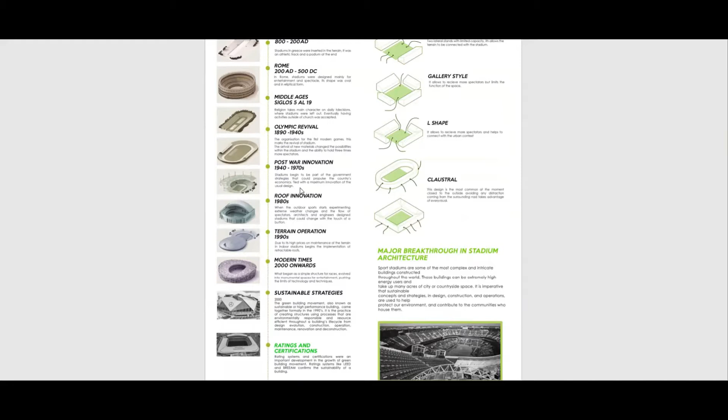As we go down the years, the stadium takes its shape as a political and economical structure, thereby overpowering the communal instinct and making it a piece of infrastructure that could earn a lot of capital for a single individual or government rather than benefiting the whole community. What began as a simple structure would then change into a complex structure involving a lot of technology and techniques. These would include sustainable strategies that are important to creating structures that are energy efficient and economical throughout the building's life cycle.

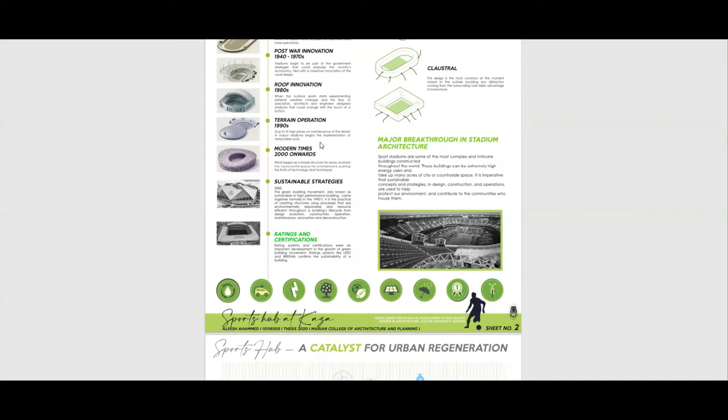Sports hubs could in many a way act as a catalyst for urban regeneration of a city. Stadiums of tomorrow could be a concept which involves more social involvement and giving less regard to the economical aspects. A stadium that lives more than sports, which would mean integration with the social infrastructure.

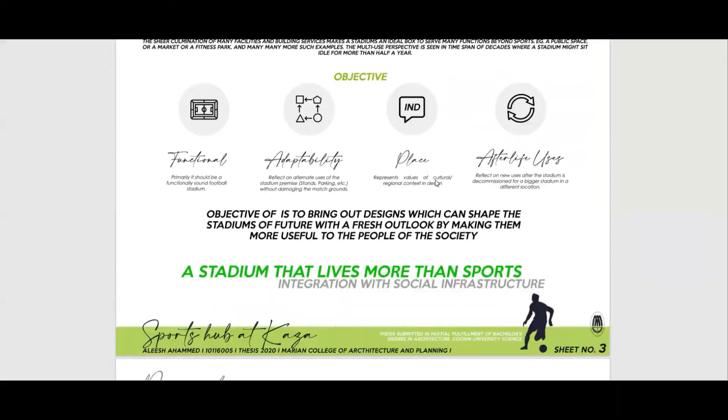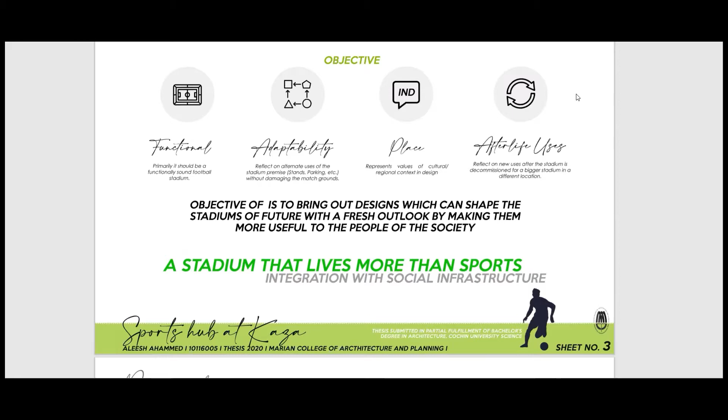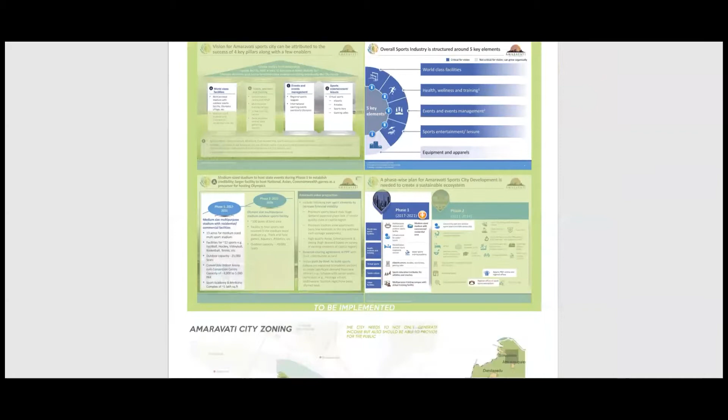Taking into account the present proposals for sports cities, the Amaravati city has been a welcome one. As and when Amaravati is declared the capital of Andhra Pradesh, there will be a sudden surge of development in the capital area, which includes dividing the city into 9 different zones, of which a sports city is one. The proposal has been rearranged by taking into consideration the present location of the site, which is near the Krishna River. The Krishna River is home to thousands of farmers, and such a proposal would mean loss of land and income for a lot of people.

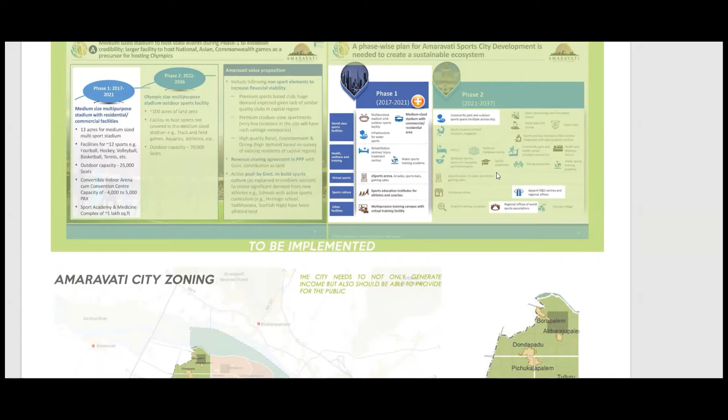The banks of the river are rich in agricultural land, which means the installation of huge infrastructure would result in improper usage of the land. The current proposal has two phases, of which a culmination of services that would mean development in a regional perspective is taken into consideration. This would include a medium-sized stadium, a community park, different sports association offices, and a training academy. Since the site of the proposal is not feasible, taking into account the social impact, it is important to find a new and feasible location for the project.

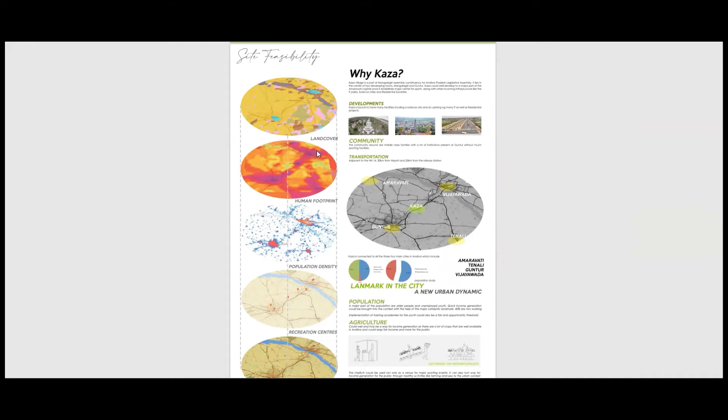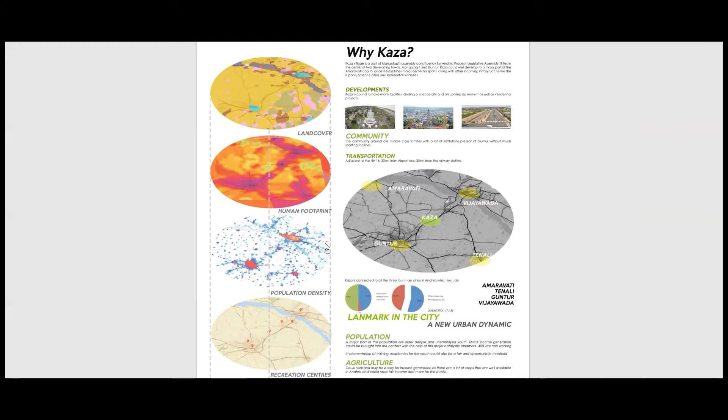Andhra Pradesh is a state wherein Vijayawada, Guntur, Amaravati, and Tenali are the main cities that form a quadrant. Kaza lies in the center of the NH between Vijayawada and Guntur. It remains as a center for development that could immediately trigger the urban scenario of Andhra Pradesh and help in producing a new urban dynamic by the showcase of the identity of the territory. A sports hub should be able to cultivate shared values between sports and sustainability.

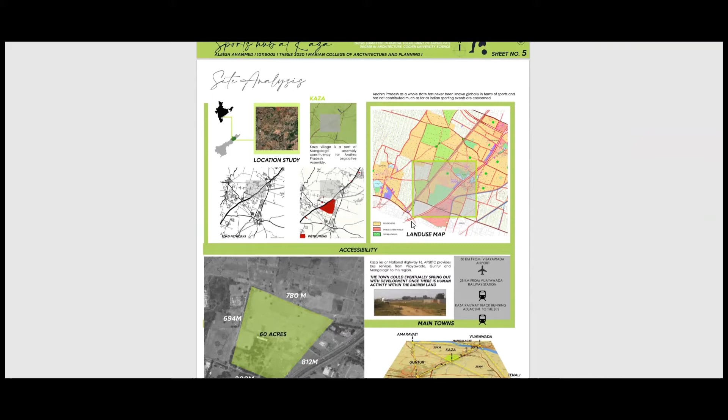Kaza as a town is accessible via road by the NH16 that links Guntur and Vijayawada. The site taken is a piece of land that is unused and away from any human involvement. The site area is 60 acres and is very close to the NH. Many sports-related institutions are found in and around the town, including the Amaravati Cricket Association Stadium. These are just patches of land that are dedicated as a ground for institutions that surround the area.

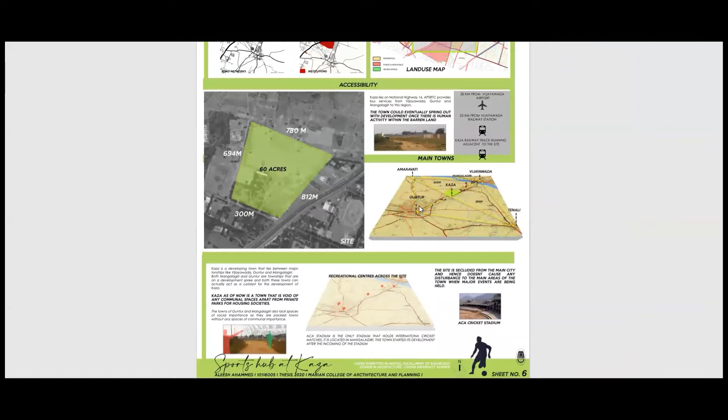The whole site is surrounded by wide roads that are accessible from all sides. There is a patch of land just in front of the site which is reserved for commercial development. The people here are mainly a majority of old and young people. Three main case studies were brought into the whole dynamic based on the usage of the stadium and its popularity.

The first one being the Jawaharlal Nehru Stadium in New Delhi. It is a major sporting institute in India capable of hosting major events. The stadium is open to the public and has a very diverse structure to it. Most parts of the stadium are abandoned throughout the year, and the outer parks and plazas are rented out for public engagements. Parking is provided throughout the site and is completely abandoned throughout the year if there are no sporting events happening.

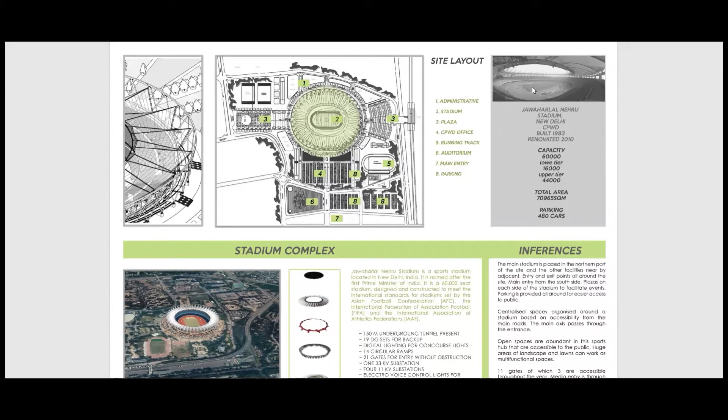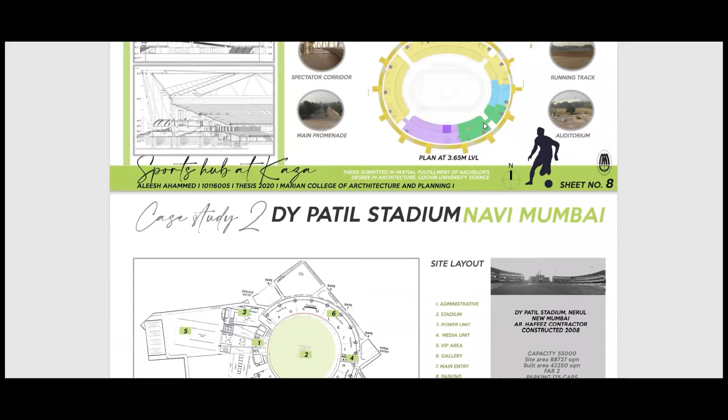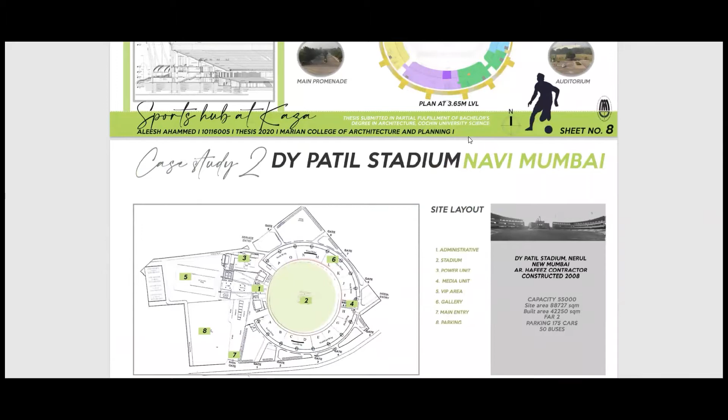The next stadium is the DY Patil Stadium in Navi Mumbai. This is a privately owned stadium and is completely restricted to the public. The stadium on its own is a landmark with its enormous structures. Usually they host 10 to 12 events per year, and the rest of the year the whole stadium stays idle. The whole stadium is built solely for the purpose of sports and concerts. And since it is a private stadium, rental services are provided and the common public has no access inside.

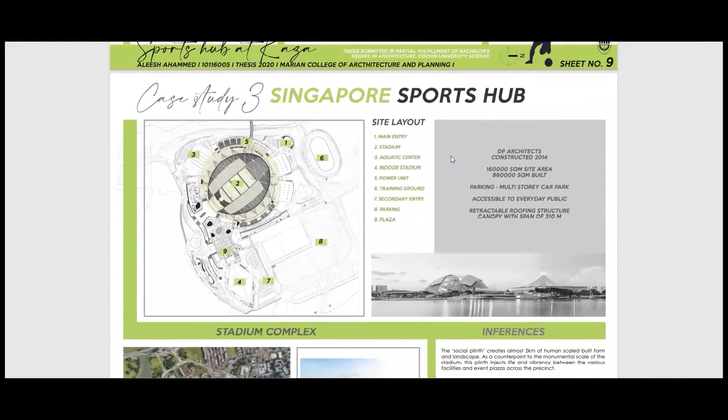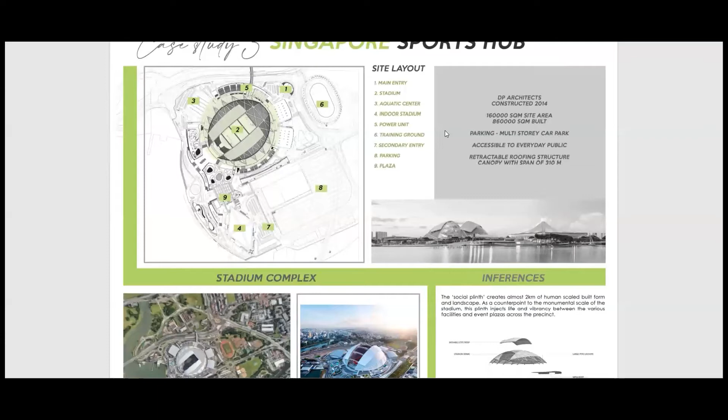The next stadium which has been taken into consideration is the Singapore Sports Hub, which is one of the most economically stable and sustainable stadiums in the world. The whole stadium is ecologically very balanced and it acts as a park, which is open to the public and brings the community inside the stadium, which makes it very active.

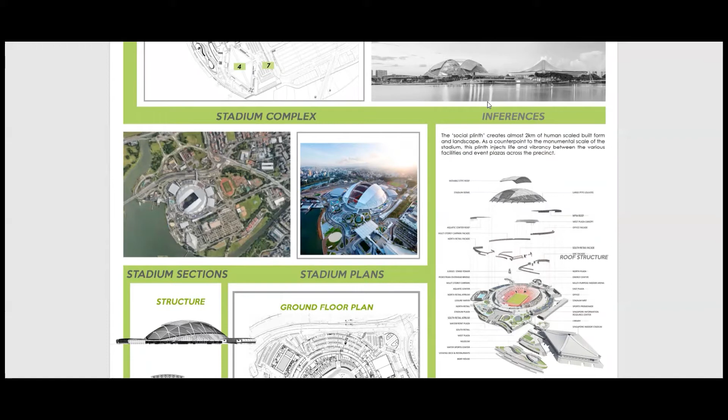There's something known as a social plinth, which creates almost 2 kilometers of human scale built form and landscape. As a counterpoint to the monumental scale of the stadium, the plinth injects life and vibrancy between the various facilities and event plazas across the precinct. The sports hub integrates landscape, water systems, and planting extensively, creating a natural setting and high quality public waterfront environment.

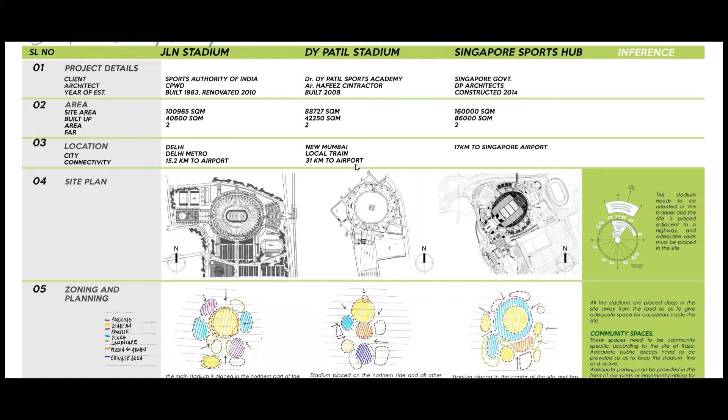Taking these three stadiums into consideration, we have a set of inferences that need to be looked into. First being the position of the stadium. The stadium needs to be oriented in a specific way as mentioned. As we come to the zoning and planning, all the three stadiums are zoned directly in the middle of the site so as to allow better public access. The spaces need to be community specific according to the site at Kaza. Adequate public spaces need to be provided so as to keep the stadium active and live.

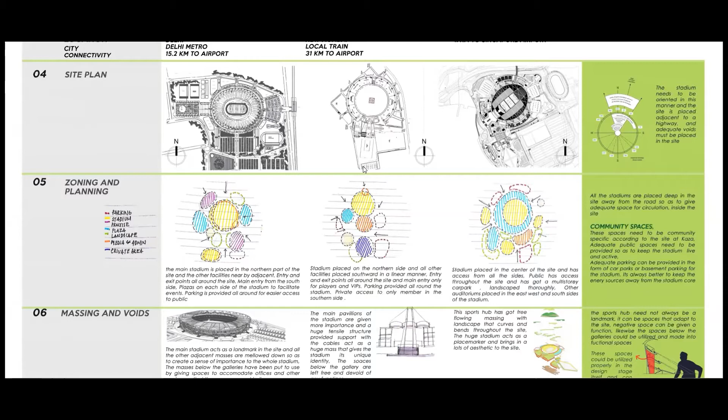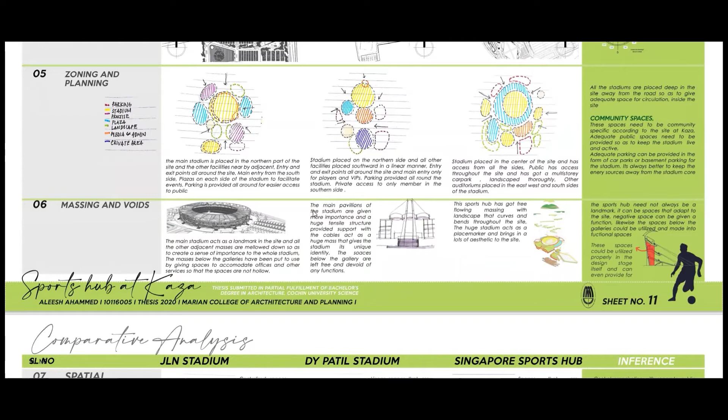Parking needs to be provided in the form of car parks or basement parking in a sustainable way, so that the parking can be used throughout the year. The sports hub need not always be a landmark. It can be spaces that adapt to the site and can be given a function. Likewise, spaces below the galleries could be utilized and made into functional spaces. These are void in all the three case studies.

So we come to the spatial organization. The central organization is mainly utilized more as it caters to the public a lot easier than if it was a linear organization. Open spaces: uniform distribution of open and built spaces is required so as to create multifunctional spaces inside the site. Increasing the number of entry points in the site so that the incoming public is controlled, and making entry points based on the usage groups in the whole site, is a major part in designing the circulation of the whole stadium.

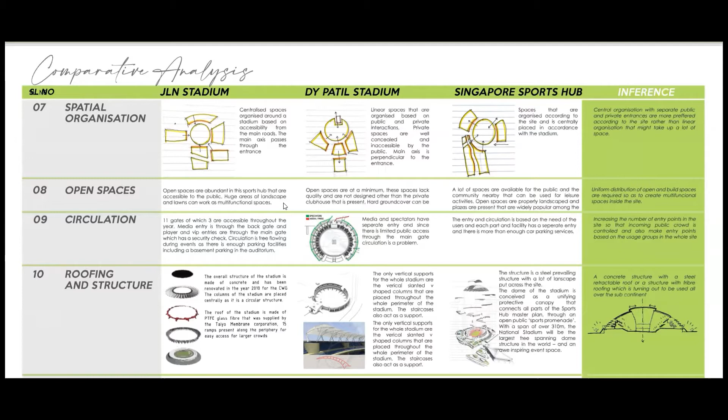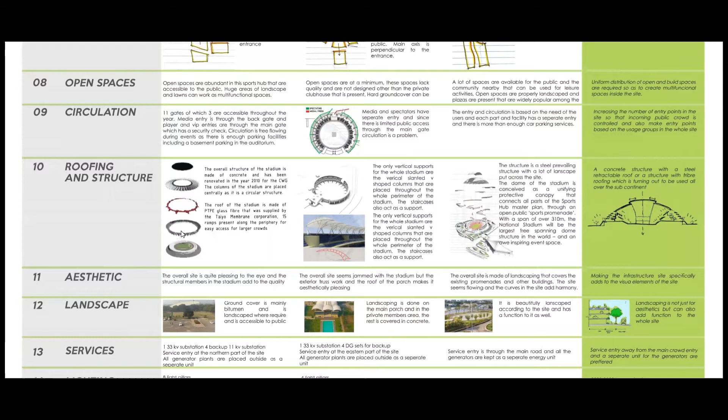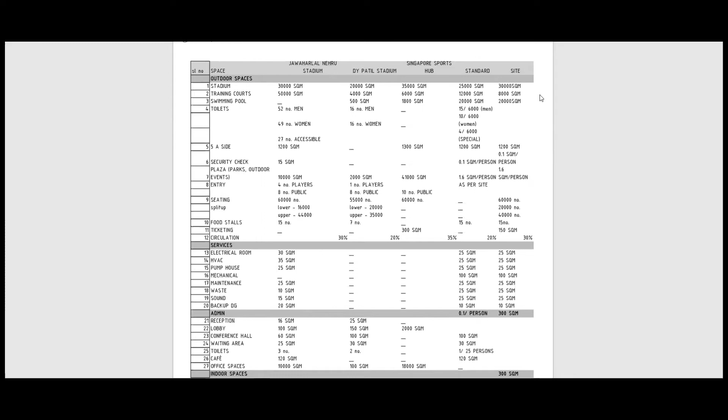The roofing structure is different for different stadiums. The roofing structure mainly consists of a structure that is aesthetically very beautiful and possibly serves a function as a shade for the gallery. The landscape is a major part in all stadiums. Landscaping is not just there for the aesthetics but can also add function to the site. A comparative analysis of the areas that have been specified in each of the stadiums taken as a case study could be put hand in hand with the standard values of each of the spaces, and a normalized value could be added that could be used in the proposal.

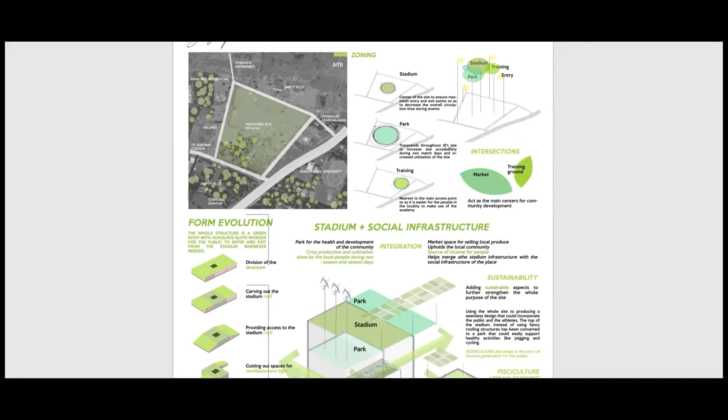Park D Casa is an ode to social infrastructure that may be a new beginning for the entire city of Amaravati. The design revolves around the three main principles in a sports hub: society, economics, and politics. The sports hub is a culmination of three main spaces that are overlapped and hence function together in harmony. The spaces include a park, a stadium, and a training complex in which all the three principles can be seen to exist mutually.

Sustainability plays a major role in reforming the whole design, not only because of the materials used and the energy efficient technology that is projected throughout, but also the involvement of the local communities to a greater extent. The park along with the stadium coexist so as to provide employment, entertainment, and energy to the local community. The stadium is multifunctional and can provide for the community in a number of ways, one of which is a market that provides employment and makes another niche for the society to engage in healthy involvements for the community.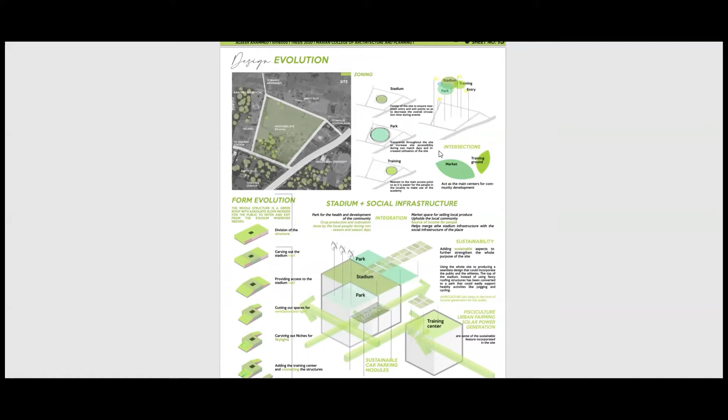The zoning consists of mainly three main spaces: the stadium, the park, and the training complex. The subsets that are formed by the overlapping of the stadium, the park, and the training complex can be used to break the monotony of the whole site. The stadium is centrally located as we inferred from the above case studies. The park is laid out throughout the site to increase accessibility to the public. Since the park is laid out throughout the site, it extends over the roof of the stadium and different slopes or different access points are provided.

The slopes are included with openings that allow the light and ventilation to be carried out easily. The top of the stadium is a green roof that supports intensive farming and also easy movement of water for drainage. The spaces beneath the roof are used as market spaces to sell the produce of the harvest from the local community and the park throughout the year.

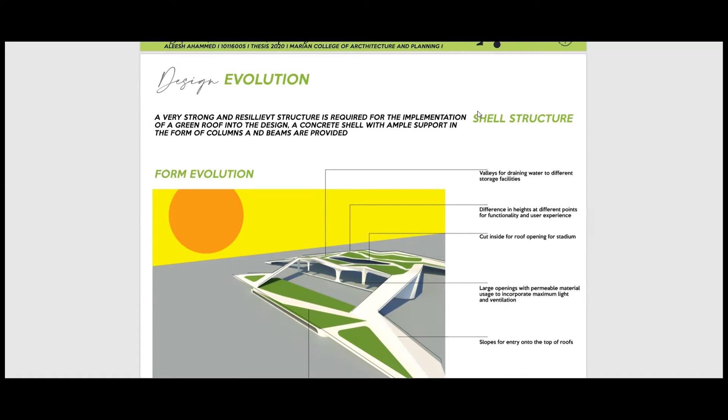A very strong and resilient structure is required for the implementation of a green roof into the design. Concrete shell with ample support in the form of columns and beams are provided. Valleys for draining water to different storage facilities. Difference in height at different points for functionality for user experience. Large openings and permeable material usage to incorporate maximum light and ventilation. Slopes for entry into the top of the roofs.

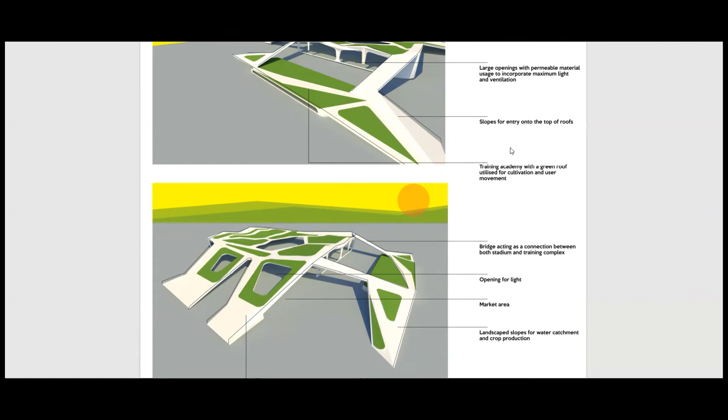A training academy with a green roof utilized for cultivation and user movement. Openings that are provided for light and ventilation. A market area that is used for economic development for the community. Landscape slopes for water catchment and crop production.

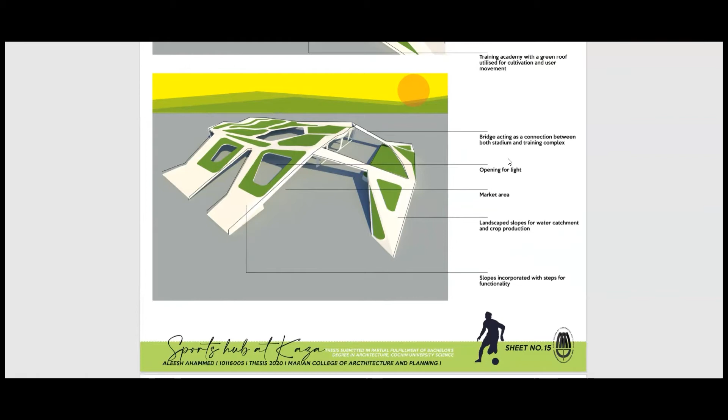The site is generally divided into three main parts. One is a park which is extended throughout the site. The next is a stadium which is located in the center of the site, and the next is a training complex which is combined to the stadium with the help of two bridges.

Some other features of the site can be divided into three based on economy, entertainment, and energy. The energy is dependent on the grid, which is formed by the sustainable car parks and the solar panels, along with the helical turbines, which connect to a power plant, which then takes in the energy and supplies it.

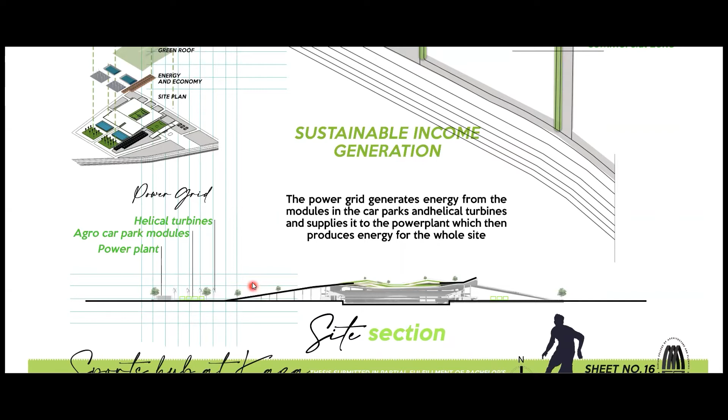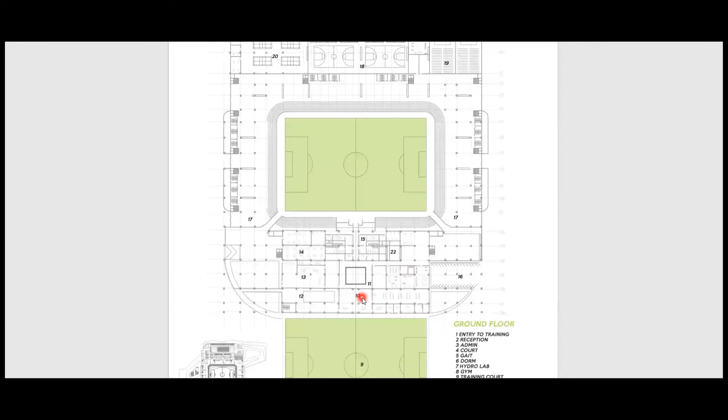The whole ground floor is divided into three major portions, one being the aquatic center, the second being the space for the spectators, and the third one being the space that is dedicated to the players, the VIPs, and the media. The space that is there for the players is exclusive, and it is for the trained exclusive players. The media can access the stadium from these two access points, and the players can enter the stadium via the training ground when there is a match happening.

This whole portion is closed and is air conditioned for maximum security for the players that come in, and also for the VIPs. The service core is provided at this portion of the site to ensure different services like electricity, pumping, HVAC to different portions of the whole stadium.

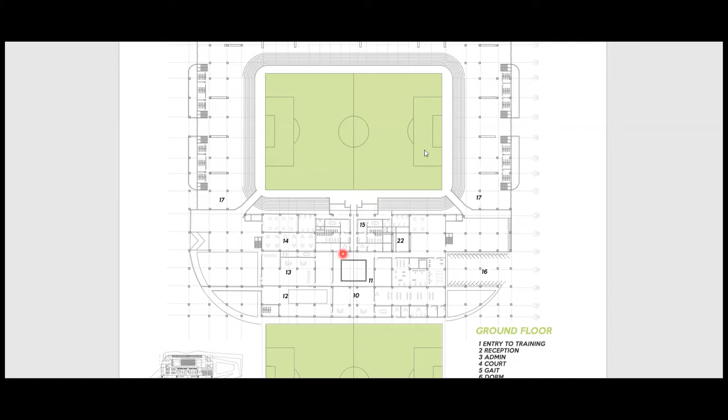Media rooms are actually located near to the stadium for view of the match, and also for the press conferences that can be located over here. The media rooms are flexible and are used as side offices when there is a game not happening. The other spaces include a gait lab, a dorm, a hydro lab, and a gym that is there exclusively for the elite players.

Coming down to the training complex, which is connected to the whole stadium with the help of a training ground, which acts as a transition space into the stadium. This is the access point into the stadium for the players, whereas the VIPs could enter through these two areas just like the media do.

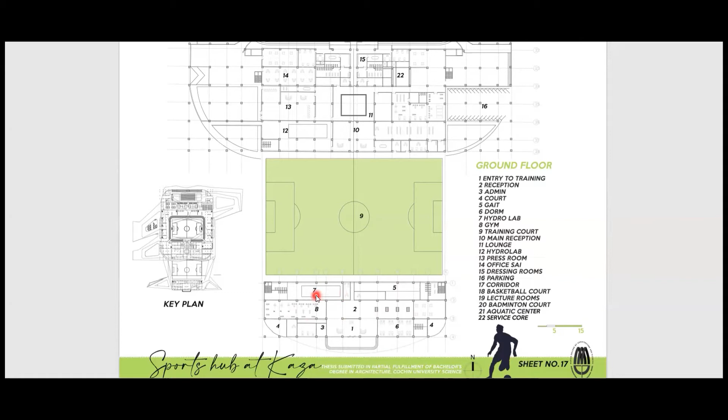As you can see, the training complex is situated just next to the axis of the site, and the elite players and the academy players can enter into this training complex. And when there are no matches happening, the training graduates or the players can hang out in this portion of the area, which has a cafe and an indoor games room. And there are other facilities on the lower level, which include a hydro lab and a gym.

Coming to the aquatic center, the aquatic center is not just an aquatic center. It takes advantage of the height that is given to the whole stadium with the introduction of diving boards, as well as the introduction of different indoor sports rooms like a basketball court and different shuttle courts.

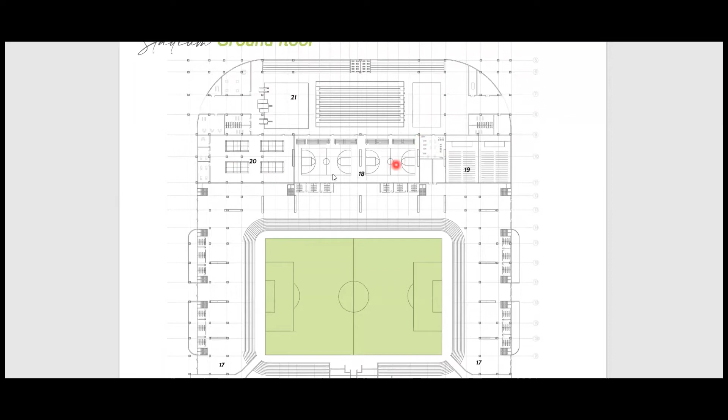As far as educating the community is concerned, there are training centers which have computer centers that are attached adjacent to the conference rooms or the tutor centers. The first floor consists of a seen below area that is there for the aquatic center, which is at a triple height from the normal stadium floor plan.

And the second portion consists of the stadium galleries, which are there for spectators, and the sky boxes that are there for the VIPs and corporates. The third portion consists of a linked community and media box, a media box that is flexible and can be used as a SAI office when not in use. The seating is provided in the corners of the stadium floor plan, so that people can use it while there is a half time.

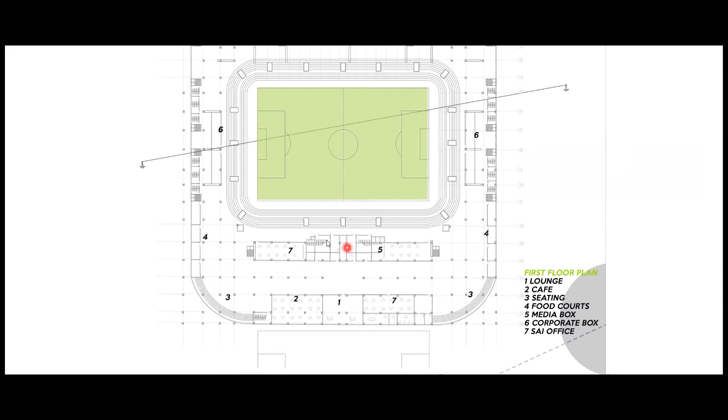And there are shops that are present at these two corners of the site of the stadium, so as to provide food for the people when they come in. The central portion is dedicated for the media, so that they can have a clearer view of the stadium and have their commentary boxes exclusively for them. And the community can also make use of the lounges and the cafes that are present over here to their maximum usage.

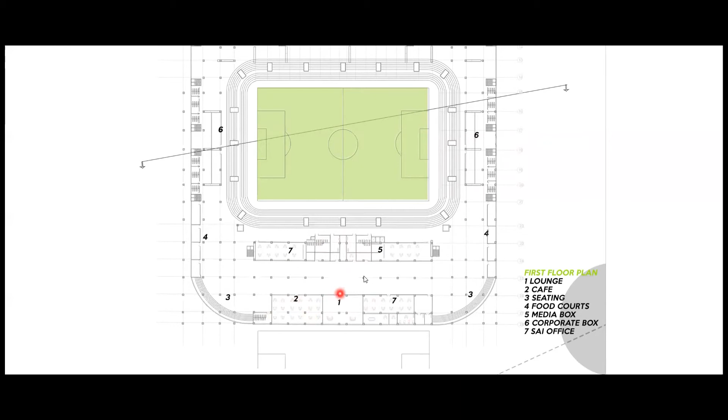From the stadium section, it is clear that the section is divided into three major portions: the aquatic center, the main ground, and the training center, when it is cut longitudinally. The aquatic center is at a triple height than the normal floor height. This is to support the diving boards and also for the indoor gaming facilities that are present over here.

The maximum height attained by the roof of the stadium is 26 meters and the minimum is 20 meters, so as to support the drainage from the top of the roof. The roof structure is supported by a truss system where there are no columns. The training center is connected to the stadium via a bridge from the top of the roof.

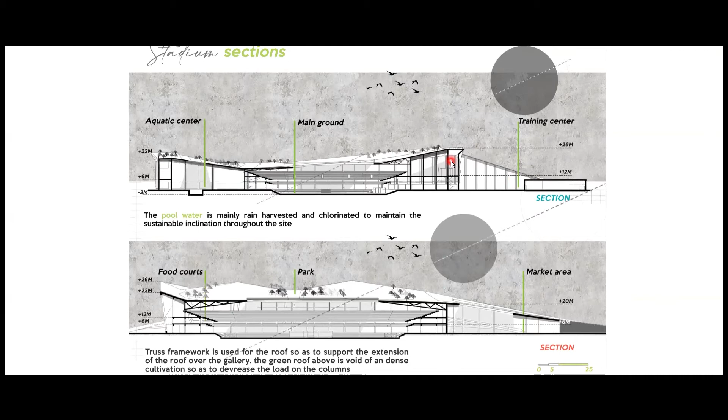As we come into the cross section, it is seen that the market area is a hollowed out structure which has a small kind of landfill. This landfill is actually taken from the portion where the ground has been dug out, so as to keep it at a lower temperature for the players.

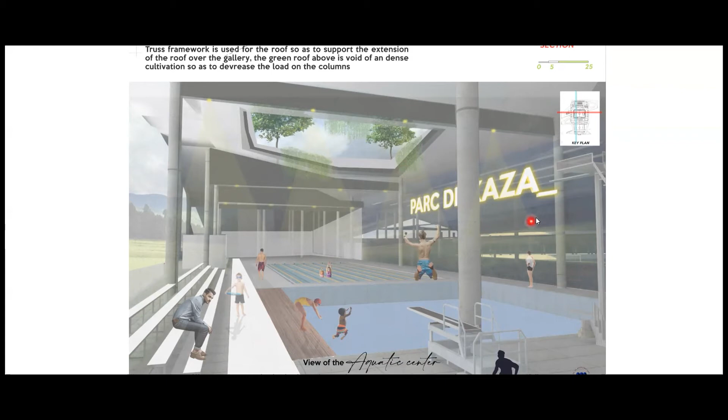This is the whole aquatic center, which consists of three major tanks: the diving pool, the aquatic pool, and the children's pool. All three pools are used by professionals, as well as the community when they are not in use. The whole space is covered by a permeable shield that shows you what is happening in the indoor games area.

The second floor consists of, as we had mentioned in the first floor plan, the same area seen below, and then comes the spectator area with a greater number of gallery rakings. And as we come into the south portion, it is seen that there are a lot of panels present. These panels are there for exhibition space.

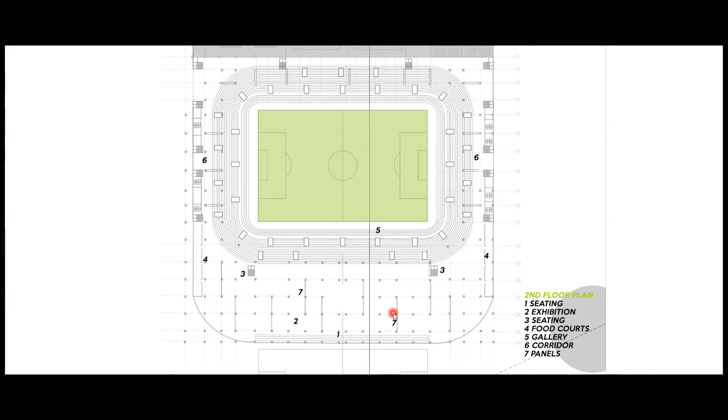Exhibitions can be conducted for the community by the community, so as to produce a source of income. Otherwise, this can be turned into an auditorium when not in use, as these panels are retractable and a greater space can be attained by retracting them. These spaces also have food courts that provide food for the spectators when they are in for a match.

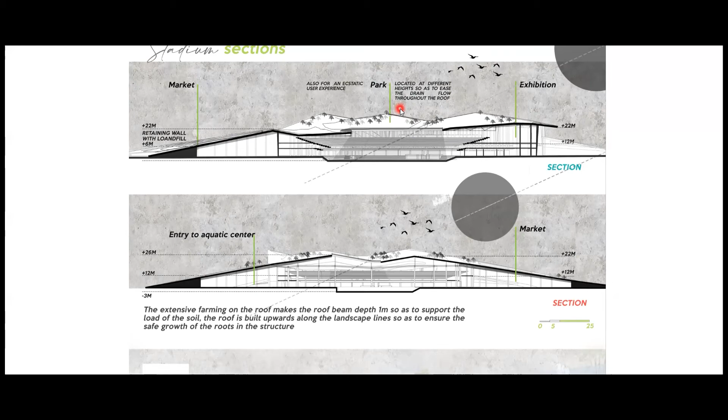As explained earlier, the section is divided into three: the market, the park, and the exhibition space. The park that is located above the stadium is at different heights for the drain flow as well as for an aesthetic experience. And the entry to the aquatic center is just like the entry to the market, which can be accessed by both the people and the professionals.

This is the whole stadium view from the stands when a match would be going on in the stadium. The overall site circulation consists of three major portions. One is the circulation for the people of the community. One would be for the spectators, the second one would be for the media, and the third one would be for the elite players.

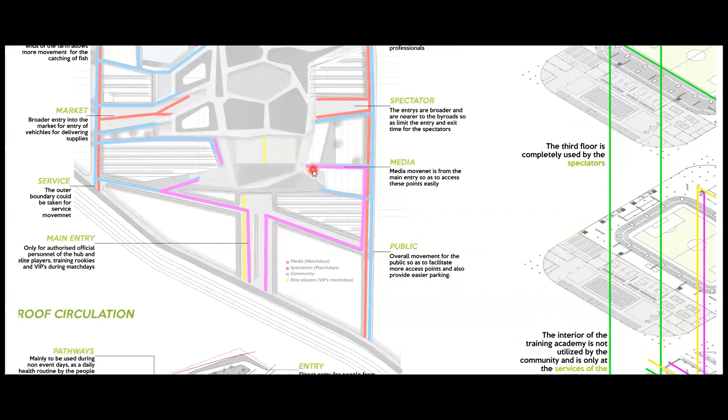The overall movement of the public is planned so as to facilitate more access points and also to provide easier parking. The parking facilities are also provided throughout the site so that people can easily use them. This is the circulation for each of the floor plans. The first floor plan is extensively used by all the users.

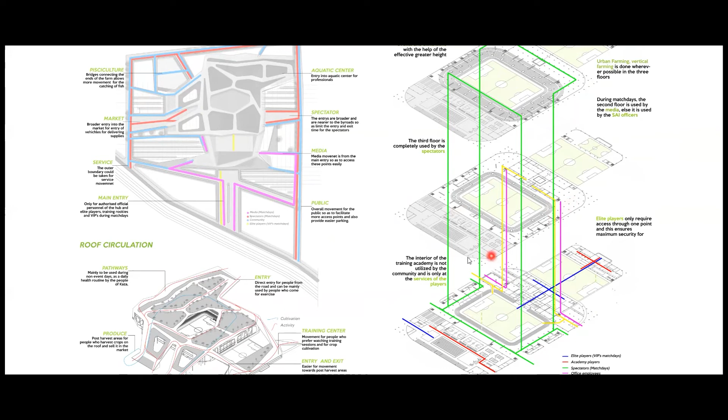The second floor plan is restricted to the elite players, and it is there just for the media and the spectators. And the next floor plan is just there for the spectators and also for the people who are there to conduct an exhibition or so on.

The roof circulation is mainly there for the community, and the pathways are used during normal days, where people can use it as a jogging track and maintain their health routine. And the blue line suggests the circulation for the people who are cultivating crops, and the produce can be harvested and put in for post production, and before it is sold to the markets, it can be kept in an area that is just behind the market, which is over here.

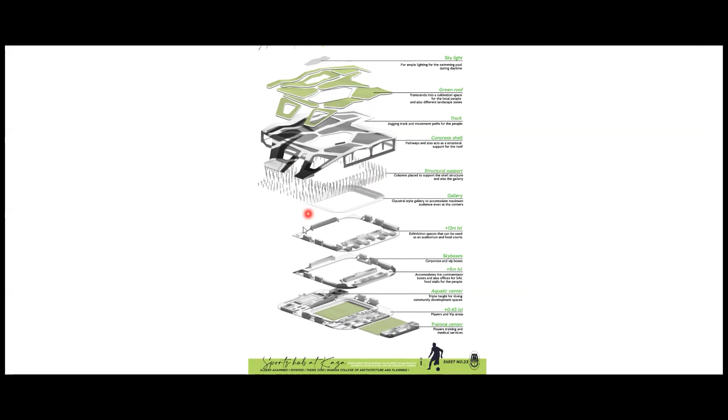This is the axonometric exploded view of the whole stadium. The stadium structure is a shell structure that is supported by different structural supports, which include beams and columns. This is the stadium section that consists of an isometric view to give you a better idea of what is happening above and below the roof of the stadium. This portion of the roof is a penetration to allow light and ventilation into the whole site.

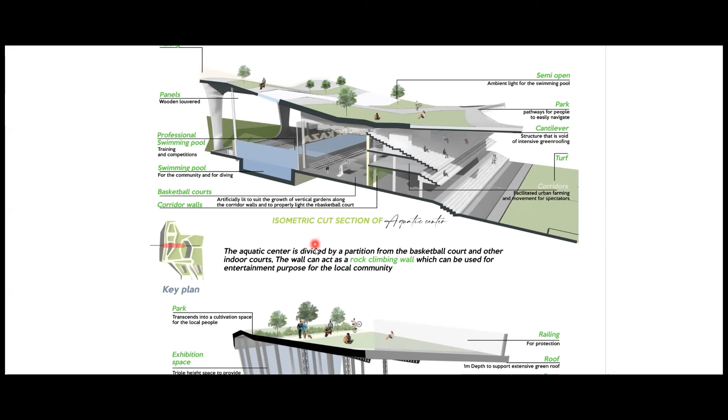This is another section from the substitutes bench. This is the whole part sections of the whole site. Here comes the market. The market area is defined by a terrace accessible green roof, and an open air market will serve as both an important hub in Kaza's supply chain and a destination for meeting and socializing and taking views of the surrounding landscape.

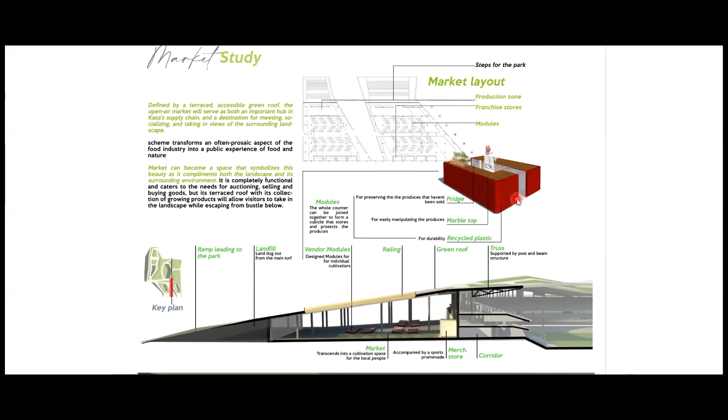There are vendor modules on this portion of the site, and then there are production areas and post-production areas of the harvested crop in this portion. There is a merchandise store which acts as ticketing booths when there is a match going on. The modules that are used in the market are completely customized so that the people who are coming in can have a safer place to store their products and for selling their daily produce.

This is the view of the market. As you can see, the market consists of modules and different partitions that allow the people to sell different products, like the fish that are cultivated from the pisciculture pond, and the vegetables that are produced from the crop production area from the roof and other parts of the site.

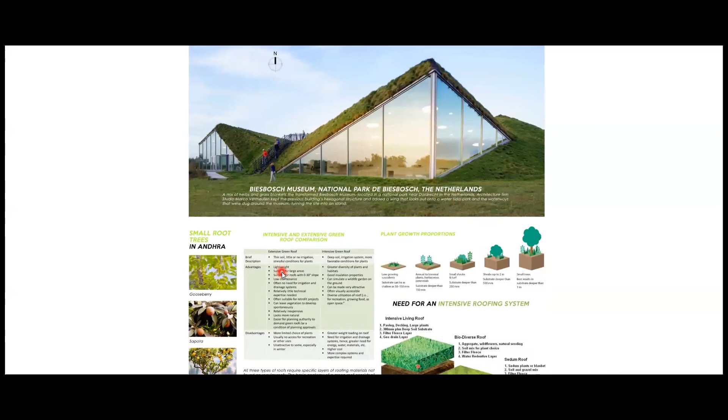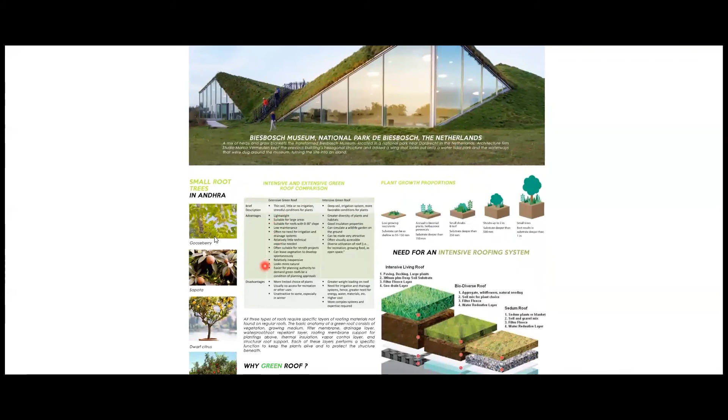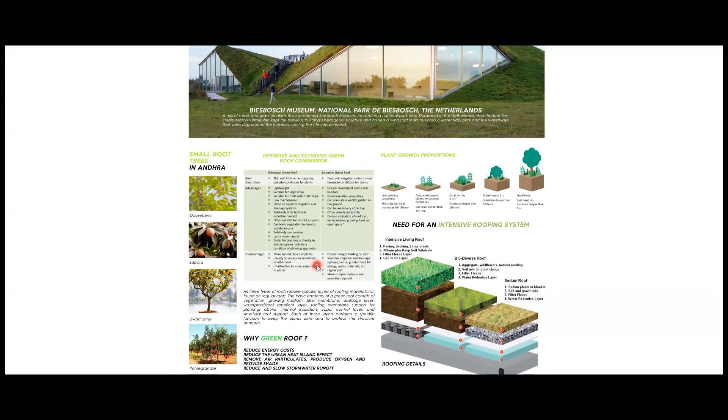The green roof that needs to be utilized over here has to be used not just for the cooling or protection for the insides of the stadium, but also for the cultivation of different crops for the economy of the whole community. There are different small root trees that can facilitate roots that grow beneath the surface of the soil at minimum height of 1 meter, with clear goals responding to the needs of the site, its surrounds, and the inhabitants of Kaza. The three original actions correspond to the three values which guide the design: sociability, quality, and discovery.

The principles of landscaping that have been implemented over here: one of the key principles used in designing the landscape is clustering and juxtaposition of varied circulation typologies, which organizes and optimizes the position of the program and the pedestrian flows within and atop the building. The volumetric articulation of the building welcomes the user and invites the exploration of the various spaces and the services, with the structure touching the ground at both ends of the pier and thereby allowing the direct access to the rooftop park and recreational areas. The key idea is to develop an ideal model of giving to the public rather than taking from the public through such high budget, large scale projects.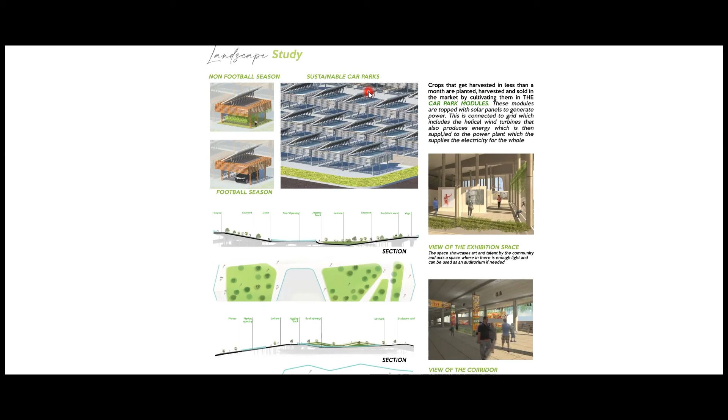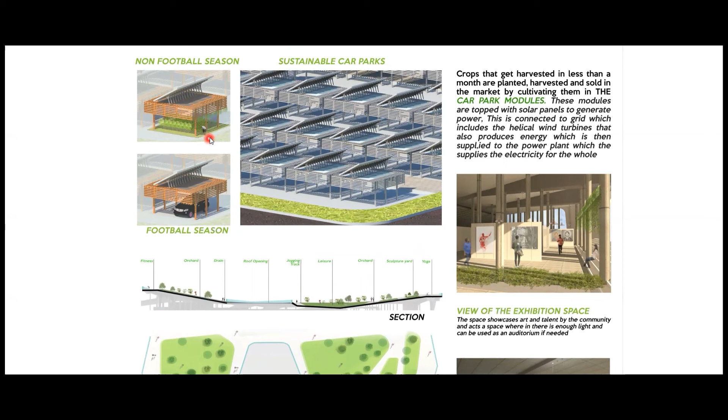The next portion of the site includes sustainable car parks, which are a pavilion that can be used as a car park throughout the football season. During the football season, the cars can be used for parking, and the pavilions give them shade. And above the pavilions, there are solar panels, which are a major part of the grid for producing energy. And during the non-football season, the whole site of the car parks can be used for generation of crops and the harvest of crops for income generation, and the indoor court, which is artificially lit, can facilitate the growth of crops as well, which are produced by urban farming.

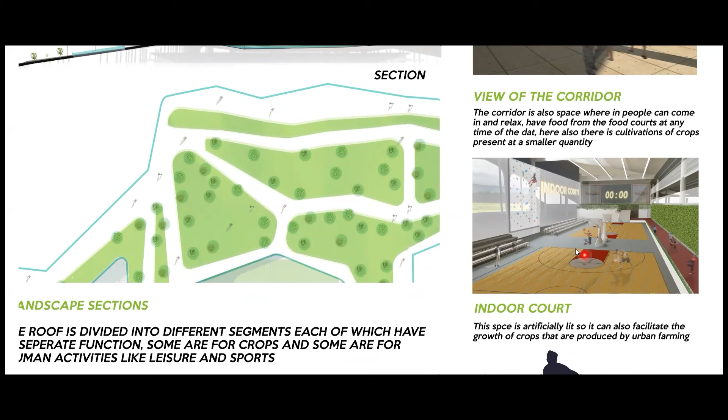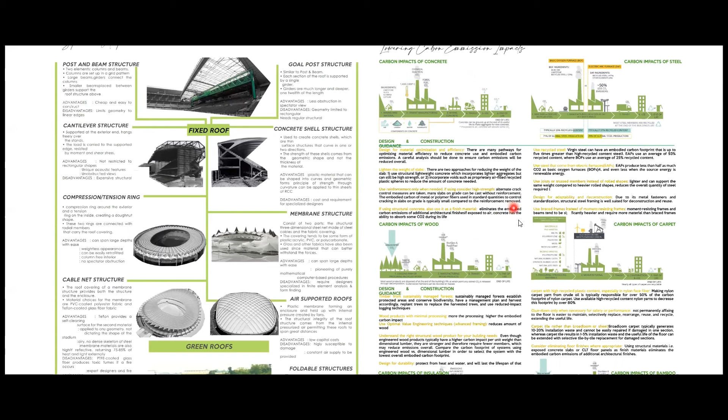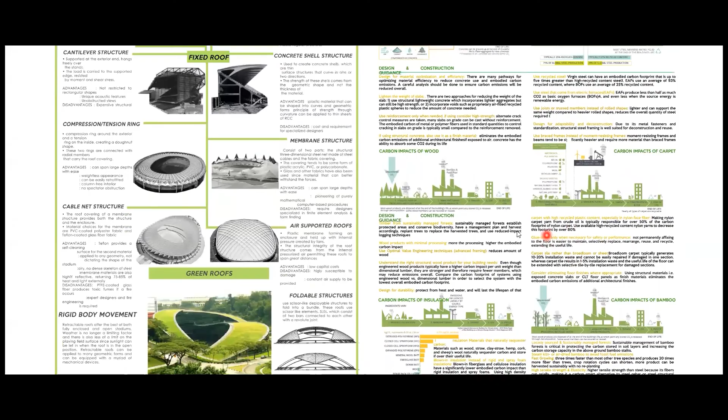The roof is divided into segments as we had said earlier. How we plan and design this new construction, based on the material study, will determine whether climate change is manageable or catastrophic. This material study is focused on lowering carbon impact emissions. Concrete is widely used in the construction of the whole site. It is responsible for 6 to 10% of the global anthropogenic carbon dioxide emissions. This can be effectively decreased by following sustainable design guidelines for material optimization and efficiency. In the same way, emissions for steel, wood, floor, and wall finishes, insulation, etc., can be reduced by following these guidelines that have been given in the present sheet. Four different services are provided, which include the HVAC, the plumbing, the electrical, and also the grey water.

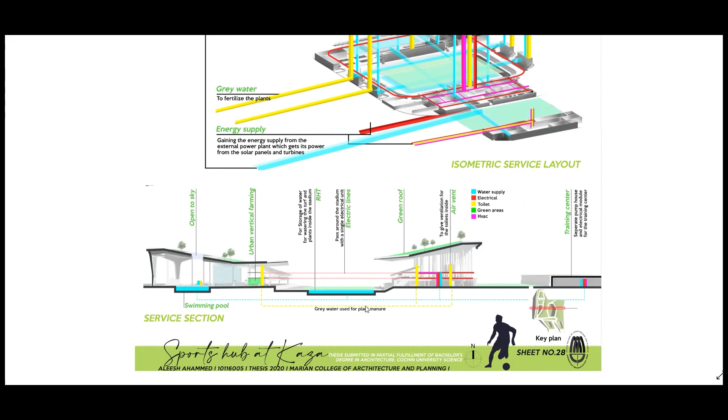The toilets are provided. The service core is provided in the central portion of the third part of the stadium, which is explained earlier, which consists of the electrical room and the mechanical room. These supply the whole HVAC and electrical panels throughout the stadium. The urban vertical farming can be seen throughout the corridors and other major walls that are kept unoccupied. The swimming pool and the rainwater harvesting tank go hand in hand as they complement each other. And the air vents for the toilets are taken up to the exhibition space and then removed through the openings that are present on the sides of the stadium.